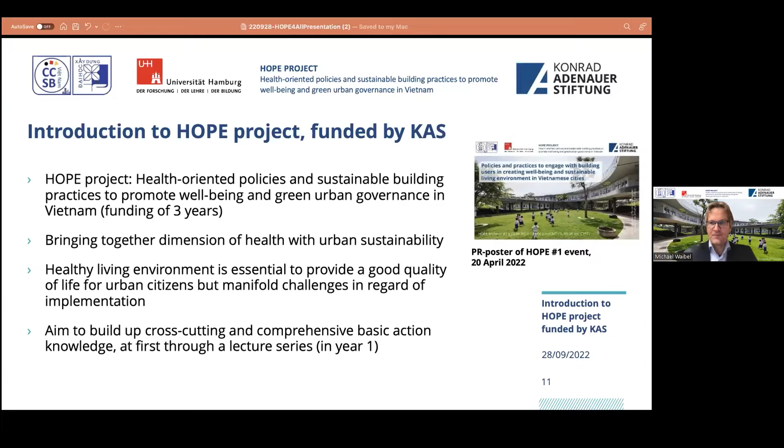Please, the next slide. We have had 4 webinars. Today, we deal with health governance to promote comprehensive life cycle assessment of materials to promote sustainable building in Vietnam. Building materials, most of you maybe are not aware, are really essential to have and to promote sustainability.

Next slide, please. If you look at the building material of concrete, a recent global report from the German Council for Sustainable Development, Humanity on the Move, Unlocking the Transformative Power of Cities, found out that there is a huge use of concrete in the world. In China alone, within 3 years, between 2011 and 2013, more concrete has been produced and used compared to the United States in 100 years. The biggest component of concrete evidently is cement, and cement worldwide is contributing alone about 10% of global carbon emissions. So we have to find and identify ways to minimize impact and maximize sustainability of these building materials in terms of construction.

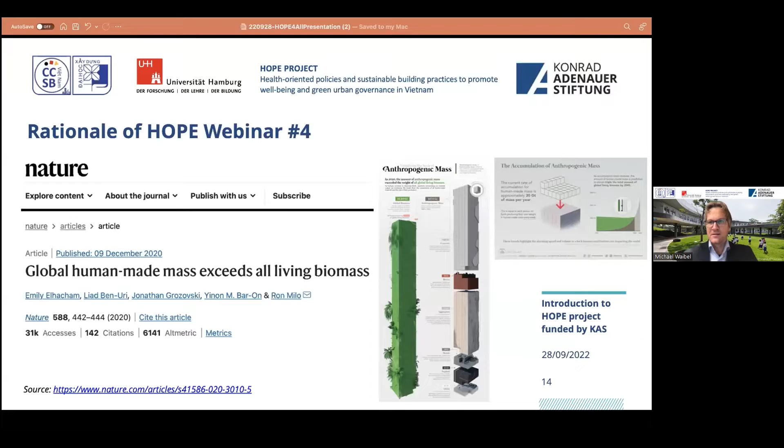And life cycle approach is one key element to that. Next slide, please. This is even more important because in 2020, we have reached a tipping point. For the first time ever on our planet, the global human-made mass exceeds all living biomass. So what we have constructed by building materials now is heavier than all the biomass on the planet. This really should be a point to think more strongly, to reinforce our efforts to promote sustainability in the construction sector.

Next slide, please. This is also one reason why we founded the Competence Center for Sustainable Building in Vietnam at Hanoi University of Civil Engineering. This center means to bundle multi- and transdisciplinary expertise of sustainable building knowledge in Vietnam, and more importantly, to transfer this innovative knowledge to the diverse areas of scientific application and to the general public. So we serve as a science-society interface. That's very important, and that makes CCSB-VN a key stakeholder in the future sustainable building practice in Vietnam. By means of this cross-cutting institution, we would like to overcome silo confinements and to develop CCSB-VN as Vietnam's not only leading think tank, but also a leading do tank in terms of sustainable building in Vietnam.

I'm very happy that my colleagues from Hanoi University of Civil Engineering have initiated this HOPE project, which is the kicking point of CCSB-VN. Thanks at this point again for the generous funding by Konrad Adenauer Foundation. Next slide. Okay, thanks. That's my short input. I wish this HOPE seminar a very good course and look very forward to the exciting presentations. Thanks so much.

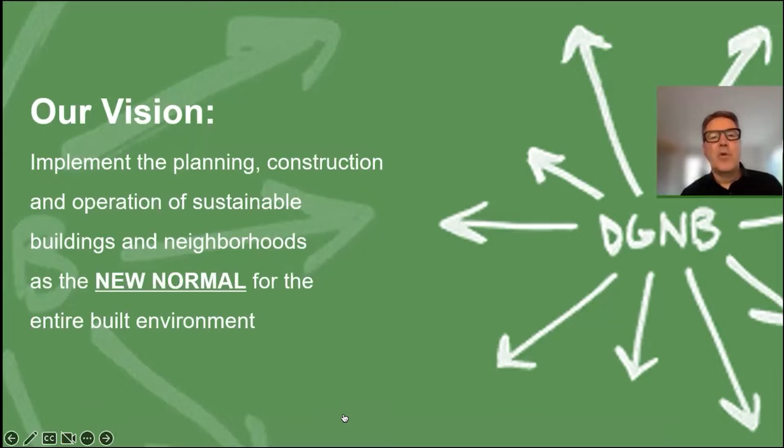This is very important. It's not a question for some lighthouse.

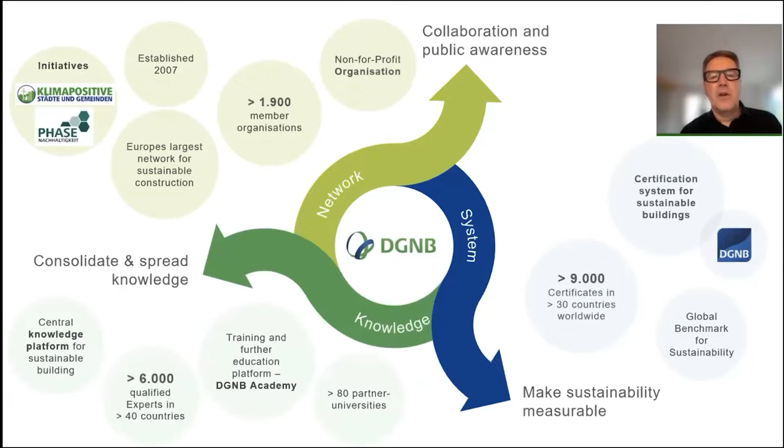Last but not least, it's about knowledge, to consolidate and spread the knowledge. For that reason, we have started the DGNB Academy to train experts for the market. If there are no experts, nothing will happen on the market. To support this, we are also working together with partner universities. More than 80 partner universities are in the network up to now. And this is not only in Germany, because sustainability is not a German issue, it's a global issue.

But today I want to talk about EU policy and how this is influencing and promoting healthy and sustainable urban environments.

A whole bunch of policies are defined and published by the European Commission. In this context, they look for a strategy and instruments to support a sustainable built environment.

One of the older ones is definitely the Energy Performance of Buildings Directive. It's the core directive defining in each member state - each member state is responsible to bring it into law. It's defining the required performance for new builds in Europe, with a strategy behind to have almost zero energy buildings by law. This EPBD is important because it's defining the future quality of the building stock.

But beside that, there are regulations like the construction product regulation, defining which products are allowed to enter the market. So this is a directive for the market. There's one single market for construction products in Europe, and therefore a European regulation is required for that. The construction product regulation is not only addressing performance but also environmental issues of construction products. It is also a basis for standardization on this level.

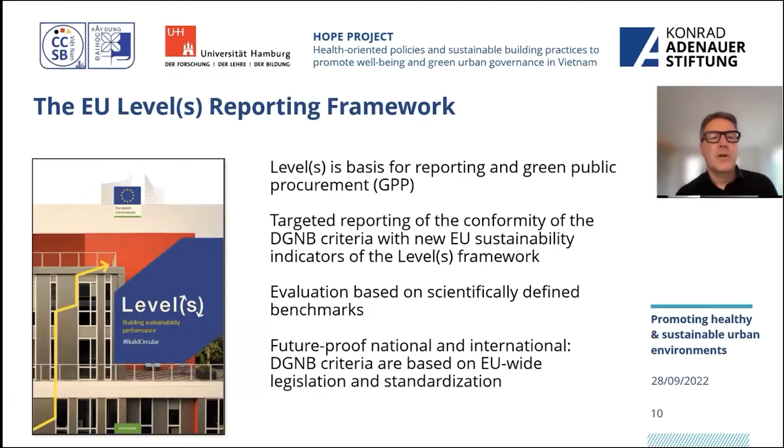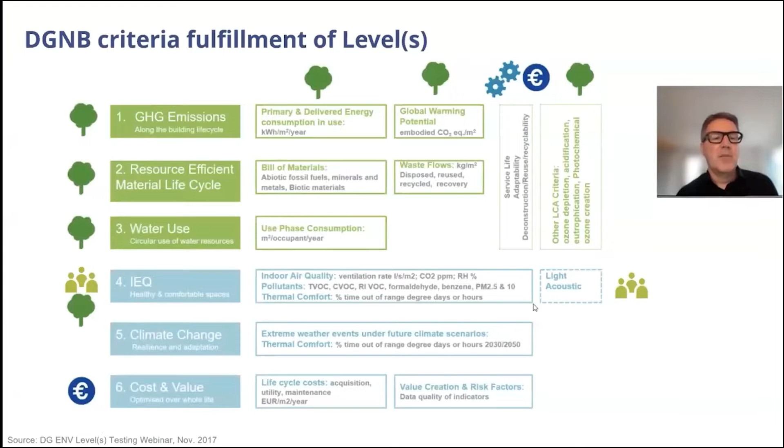The second part, or the newest element, in EU policy is the European Green Deal, with the taxonomy, the renovation wave, and a revision of the EPBD.

The EU Green Deal is, as Ursula von der Leyen said, Europe's man on the moon moment. So it's really starting something new.

It was published in December 2019, and it claims that Europe will become carbon neutral by 2050.

This is a big thing because a lot of things have to be done until then, so we have intermediate steps.

By 2030, at least a 55% reduction of carbon emissions compared to 1990 is targeted.

But also instruments like a carbon border adjustment mechanism, a draft of which is now published, are parts of the Green Deal.

In the end, the Green Deal wants to mobilize at least one trillion of sustainable investments over the next decade, because somebody has to pay for it.

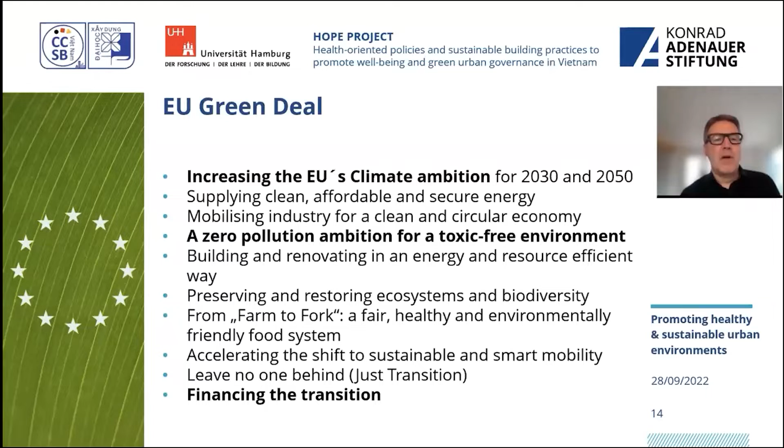But financing the transition is one of the core instruments, so I want to talk a little bit about this.

Financing the transition has a certain strategy. The first stage is to disclose the externalized costs. That's the first element. Secondly, to define what sustainable investments are.

Without having this definition, like for sustainable buildings, the DGNB catalog, without this definition it's not possible to increase the share of sustainable investment.

And it's not possible to put policy instruments on it without that definition.

If we look into this set of regulations and directives, you can see that the taxonomy, which defines what's sustainable and what's not from a finance perspective, is a core of these regulations.

But also the Sustainable Finance Disclosure Regulation is important because it defines who has to report about what.

So companies involved in the finance sector now have to report the share of green or sustainable finance, or the money they give to sustainable finance.

Secondly, the non-financial disclosure regulation is defining who has to report.

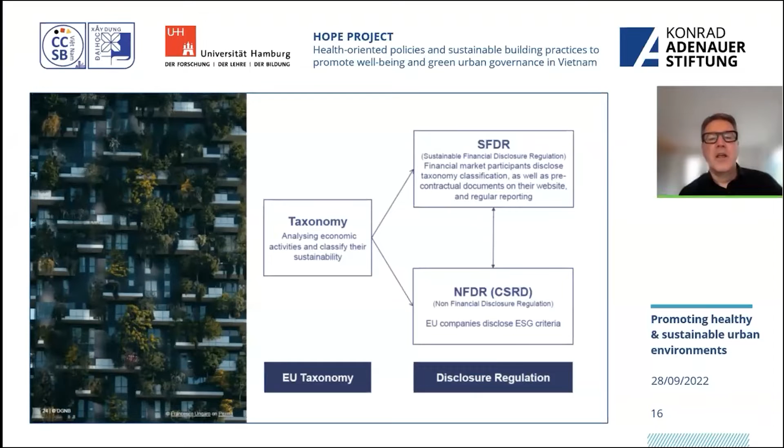So what's included in the taxonomy? The taxonomy has six environmental objectives, and here you can find again the criteria from the Level(s) reporting framework.

So you see consistency. First of all, climate change mitigation and climate change adaptation are core elements.

But also sustainable use and protection of water, a transition to a circular economy, pollution prevention and control, and protection and restoration of biodiversity and ecosystems.

So it's about the environment and about the climate, which is addressed in the taxonomy. I won't explain now how it works, but in the end you have to contribute significantly to one of these elements.

And for the other five, there are so-called 'do no significant harm' levels to achieve.

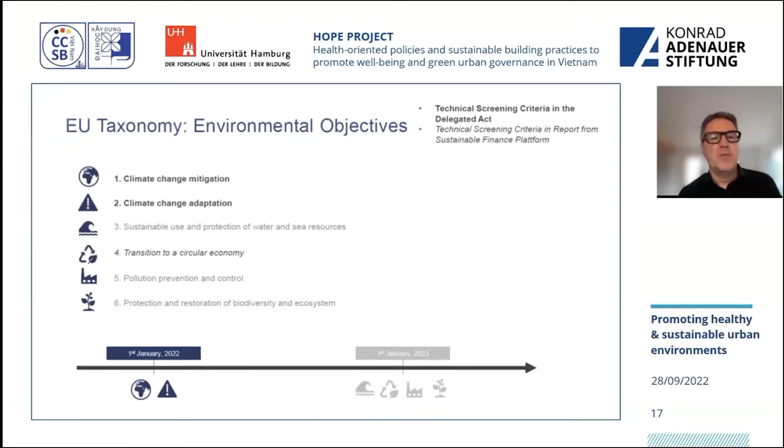If we now look at what this means for the EPBD, the Energy Performance of Buildings Directive, there will be main changes compared to 2018. From the new draft, new buildings will be zero emission buildings.

In the past it was nearly zero energy; now the target will be zero carbon emissions. The worst performing buildings are now addressed, which was not the case in the past.

So we will get a minimum standard about the performance of buildings, where you are allowed to rent it out, for example.

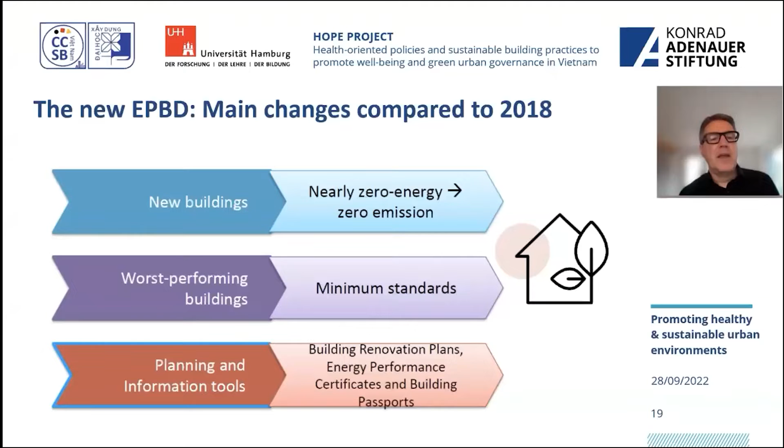This means there will be high pressure to renovate the worst performing buildings, and planning and information tools will be in place, like the building passport.

But now I want to come back to the sustainable construction strategy in Germany. Look at this beautiful building — it's the office building of the Environmental Protection Agency in Dessau.

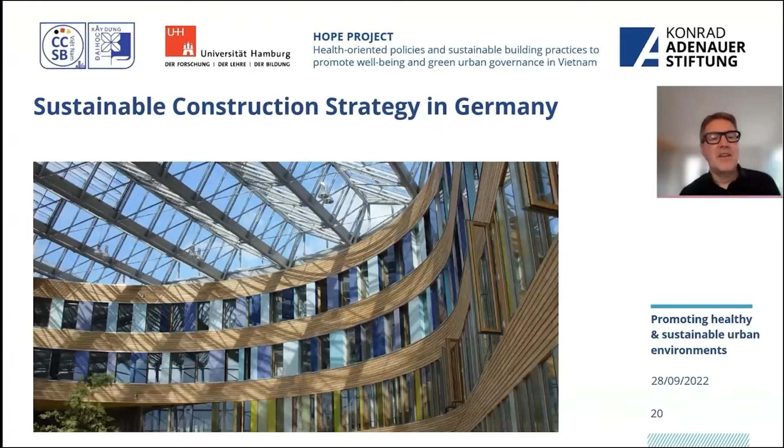Sustainable construction has a long history in Germany. More than 20 years ago, the Roundtable for Sustainable Construction was established by the ministry. The idea was to have all stakeholders on the table, discuss and get consensus on what's sustainable construction and what we mean by sustainability in the context of the construction and building sector.

Out of this work, after years, a guideline for sustainable buildings was developed and published. This guideline is now mandatory for new federal buildings, so the federal government is giving an example of how to build, which is an important signal to the market. The DGNB certification scheme is based on this guideline, in line with the findings of the Roundtable for Sustainable Construction.

Some principles and methodology behind this: there's a holistic view, meaning environmental, economic, social and functional qualities have to be included and brought into balance. This is important because if we cannot afford sustainable buildings, it won't happen at scale. If it's not good for the people, it won't happen. And if it's not good for society, it won't happen either. So this is one of the key pillars of this methodology.

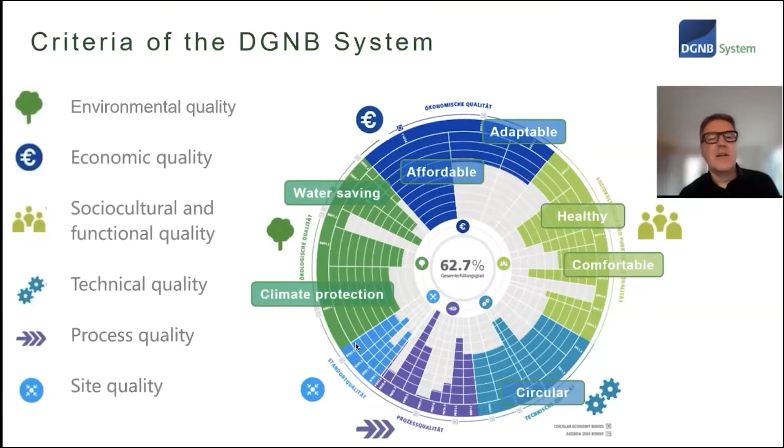But where should the data come from to do life cycle assessment? This is always a critical point. In this context, a combination strategy was developed at the Roundtable—a combination between a public generic database, called ÖkoBauDat, and EPDs, Environmental Product Declarations, for specific data. The responsibility to provide environmental information for the supply chain and value chain is on the industry side—who knows better what the company does than the producer himself?

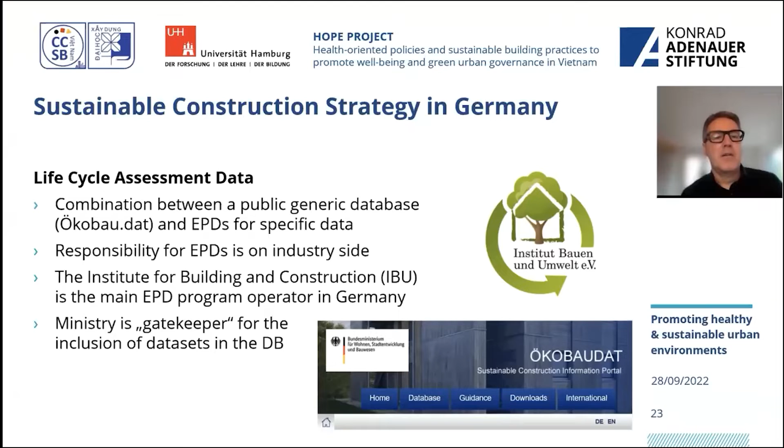There is a system developed, an EPD system, which is a global instrument. We see it in many countries, and it's operated by the Institut Bauen und Umwelt, the Institute for Construction and Environment. They look for consistency and third-party verification of the EPDs. The ministry is now the gatekeeper for the inclusion of data sets in the database, doing a second quality assurance. All EPDs in line with the methodological requirements can come into the ÖkoBauDat, which is part of the public database. I will come back to the role of this database later on.

Part of the strategy in Germany is the Climate Change Act from 2021. We have realized that within 23 years, CO2 emissions must be reduced to zero, which is very ambitious. If you see in this graph how emissions are coming down, we have to be faster, otherwise we may become climate neutral in 2070, not 2045. That is the aim, and the minister has presented this graph and really told us what the next steps are.

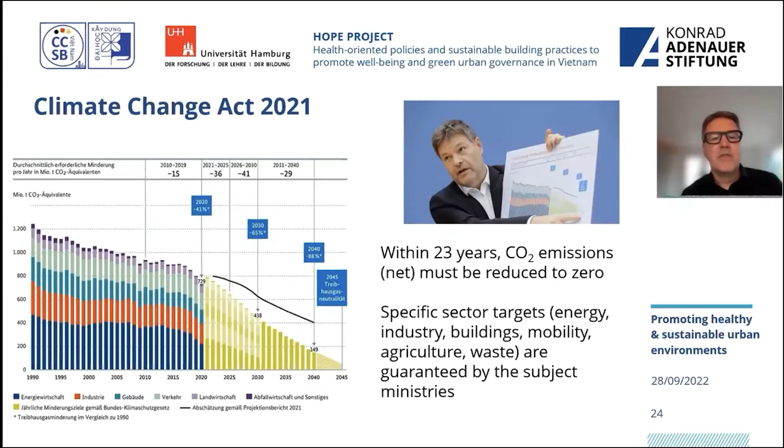One of these next steps is that subsidies for sustainable buildings are given in line with the quality mark for sustainable buildings. This funding scheme now combines the efficiency house—a certain performance level for the operation of buildings in line with the Energy Performance of Buildings Directive—with the sustainability class, which includes a life cycle approach, both underlying this quality mark.

But beside that, there are also other specific requirements in the quality mark. It's not only about carbon, it's also about energy use, use of certified wood, prevention of hazardous substances, design for all—very important—and green roofs for office buildings. Having these additional specific requirements beside the general requirements is necessary to bring the different qualities into balance. The documentation is done via a certification scheme like DGNB, where the specific requirements are documented and checked. It is available for new buildings—residential, offices and educational buildings—up to now, and it will be included in the renovation schemes coming next year.

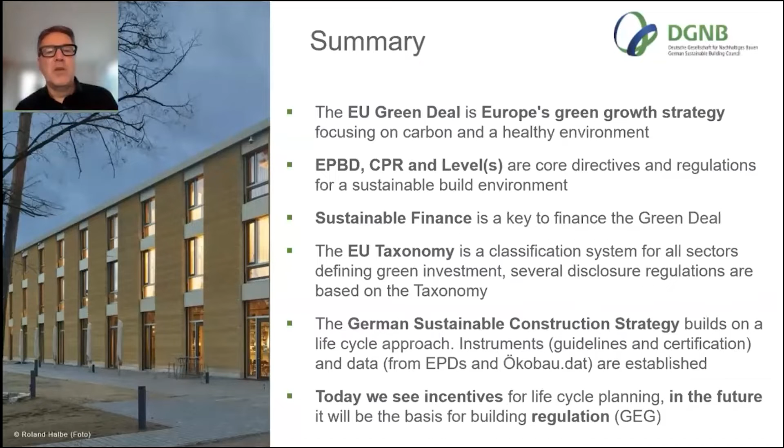Thank you very much. And with the view of this great building, which has a clay wall here, it is 12 meters high, I want to finalize my speech. Thank you for your attention and have a great day.

Thank you to Dr. Grieshammer, although he's not here with us in person, but we are fully informed of policies and instruments currently in effect in Europe and in Germany to ensure healthy and sustainable building practices. How about Vietnam? How are green buildings and sustainable construction being developed in Vietnam? Let's continue with our next speakers.

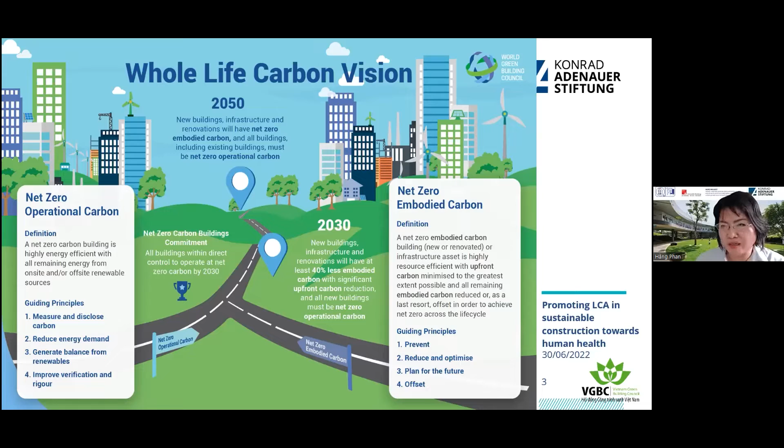So the WGBC issued the net zero carbon plan. First, it focused on operational carbon, the carbon emitted during the operation of buildings. And in 2018, the WGBC announced a more ambitious plan, which no longer focuses only on operational carbon, but also on embodied carbon, the carbon included in the materials of buildings. If you look at the annual global CO2 emissions, construction accounts for 39% of carbon emission, 28% from operational carbon, and 11% from embodied carbon.

So when we aim for net zero, what exactly do we aim at? You look at the left side, you see that buildings account for 39% of total emission, and it is projected that by 2050 it will increase even further because we will have double the current floor space. So in order to achieve net zero carbon, where can we have the reduction?

There are 3 strategies we can use for decarbonization. First, we need to reduce operational carbon, we increase resource efficiency as we operate buildings. This is the fastest and most economical way for us to reduce carbon emission and increase resource efficiency. We will be able to save 35% of carbon emission from operational activities.

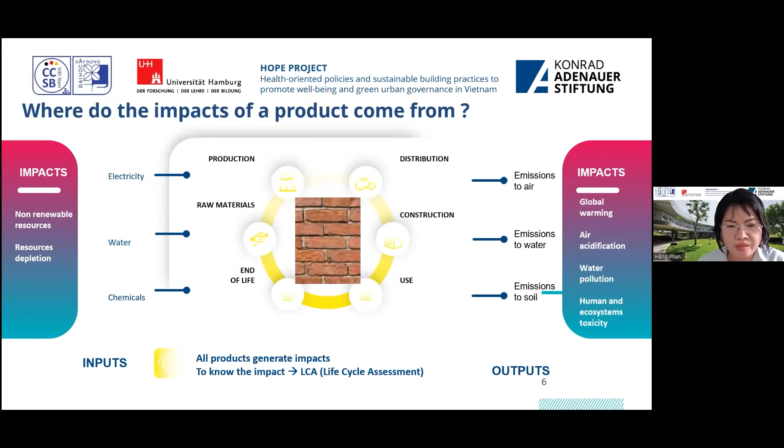So the LCA accounts for all the inputs, for example electricity, fuel, chemicals, water, and then it calculates the emissions to the air, to water, and also to soil, and then it identifies the impact. We start from the moment inputs are extracted and throughout all processes, distribution, construction, use, and recycle. And then we get an overview, a comprehensive view of the environmental impact of the product.

So this is a definition of LCA. As you know, LCA at the moment is the most common method to measure environmental impact, and it's based on two standards, ISO 14040 and 14044, which provide common standards for LCA measurements to ensure that we all follow the same standards to allow quality and comparability. At the moment there are different labeling systems, which may be confusing, but LCA allows us to compare buildings and systems according to the same standards globally. So LCA follows many steps

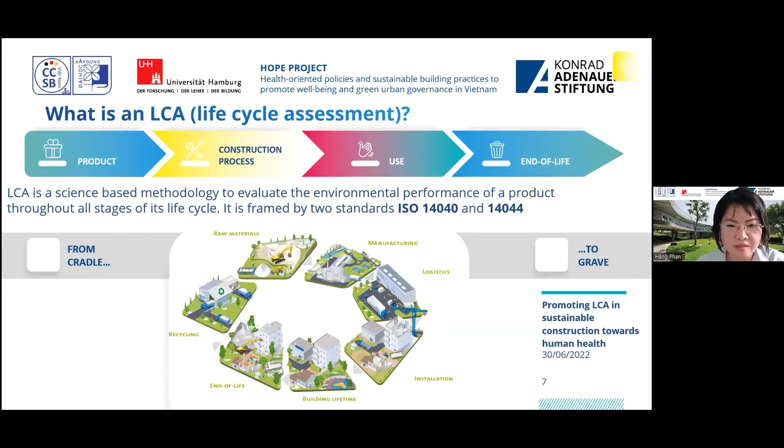throughout the life cycle of a building, from cradle to grave, from the beginning to the end. It starts from the moment raw materials are extracted through manufacturing, installation, use and apply, and recycling. This LCA method will provide us with a series of quantitative values for comparison. One thing to consider

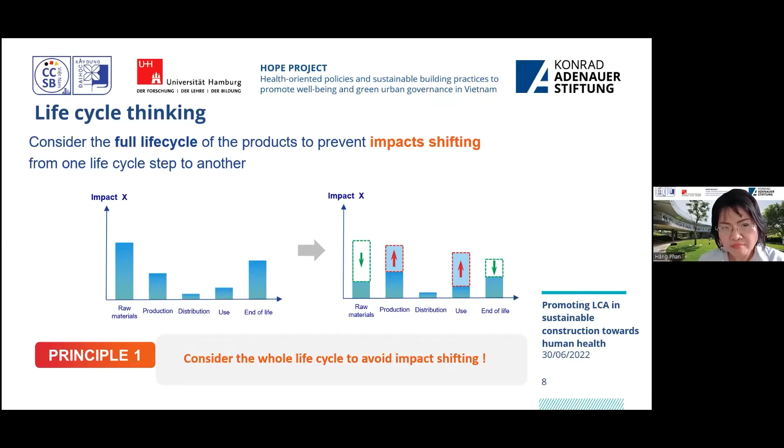is why we need to consider the full cycle of the product. Sometimes you think you need to look at only one step, but for example, in terms of production, we want to measure product A. When it is manufactured, it releases less emission than product B. However, if we follow the life cycle, we learn that after distribution, product B will actually produce less emission than product A. So some products will emit less emission during the production phase, however it will release more emission during the use phase. So we need to be mindful of that.

And this diagram shows the embodied carbon from A1 to A2, A3, which is: A1 means extracting materials, A2 transporting to factories, A3 production. So if we focus only on production, we focus only on A3, but we leave the remaining steps: installation, transportation, use and apply. After the building is demolished, there are other steps such as the potential for recycling. So we need to measure all the steps from A1 to C4.

So throughout this life cycle, you see that apart from the B6 and B7 periods, which are operational energy use and operational water use, all the remaining steps refer to embodied carbon. And at the moment, we see that the standards in Vietnam often look at only one step. Why? In fact, we need to measure all the steps throughout the life cycle if we really want to achieve

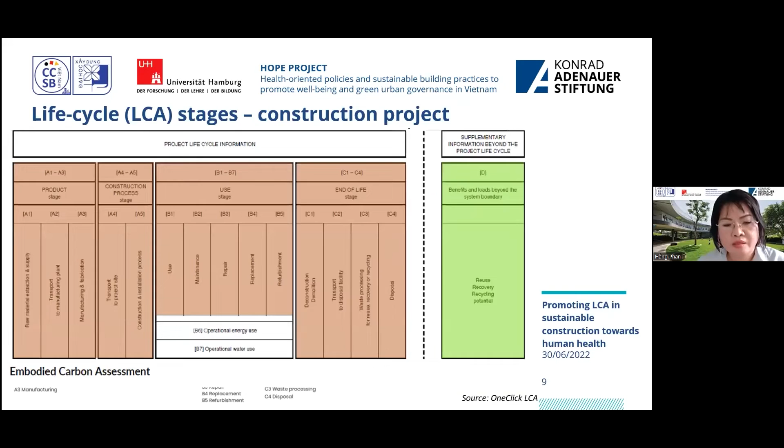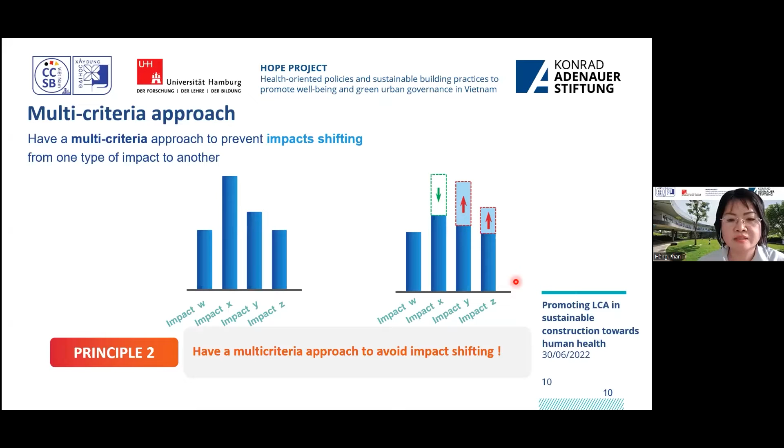net zero. Another principle is we need to have a multi-criteria approach. For example, on the left, a product has impact X which is less than the impact X of another product. However, in terms of impact Y and impact Z, it actually has more impact. In that case, we need to be mindful of impact shifting.

So what kind of impact do we need to be mindful of when we use LCA? First, global warming potential: how the product contributes to global warming, measured in kilograms of CO2 equivalent. Second, abiotic depletion potential, for example the depletion of fossil fuels and minerals.

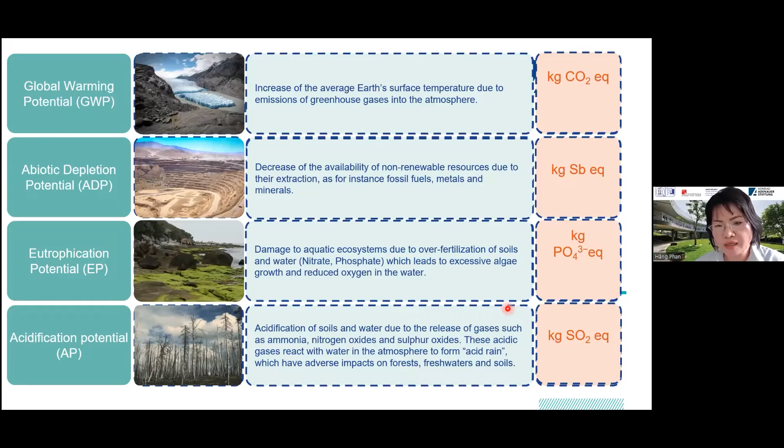Eutrophication potential refers to the impact of over-fertilization of soils and water, which leads to excessive algae growth. Another thing to look out for is acidification potential, such as sulfur oxides and nitrogen oxide. These acidic gases may create acid rain, which has severe impact on forests and rivers. Another impact may be photochemical ozone creation because of hydrocarbons and VOCs, colloquially known as summer smog in cities.

Another impact is the ozone depletion potential because of emission to air of CFCs and other halocarbon compounds, often used as solvents. Then we need to look at total primary energy use, measured in megajoules, and the amount of water we require to produce those materials. These are the key indicators that we measure using LCA, giving us a total of 28 indicators so we can measure the environmental impact of a certain product.

So depending on the product, not every material has to go through all 28 indicator measurements, so it depends. After we run the LCA assessment...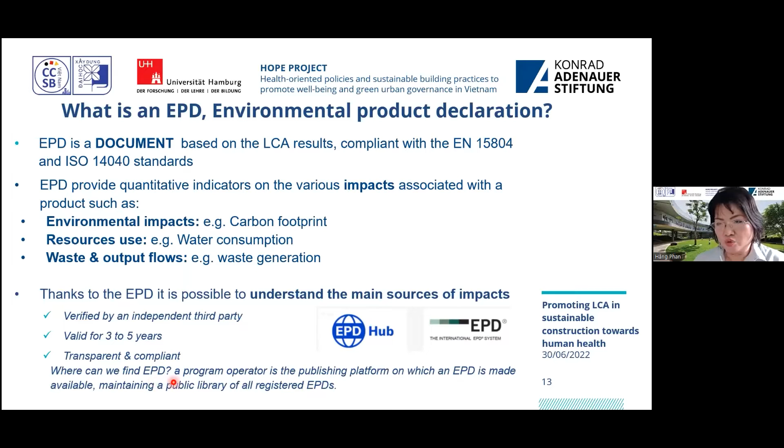Using EPD, we can identify the various environmental impacts of a product. The good thing is that EPD is verified by an independent third party, very transparent, and it is valid for 3 to 5 years, and it is accessible using a public platform.

So what you will find in EPD, normally there are 5 sections. First, general information about the factory where the product is manufactured. Second, product description. Third, LCA calculation information—what kind of LCA we use. Then life cycle stage description from A1 to C4, or only A1 to A3. Finally, LCA results as quantitative measurements, which are the most important part in an LCA.

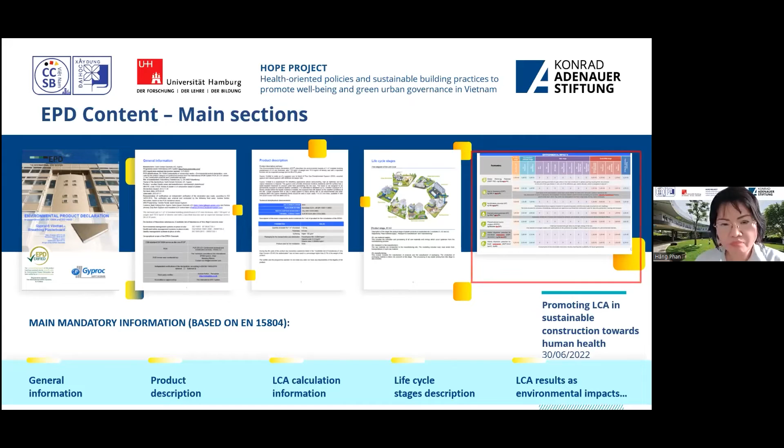So when we compare LCA results, we need to pay attention to the functional unit of the EPD—whether we are using the same functional unit, for example 1 kilogram of concrete is different from 1 square meter of concrete walls, or whether we are using the same set of measurement, A1 to A3 or A1 to C4.

Who can use LCA and EPD? There are 3 groups: developers or investors, consultants, manufacturers, and policymakers.

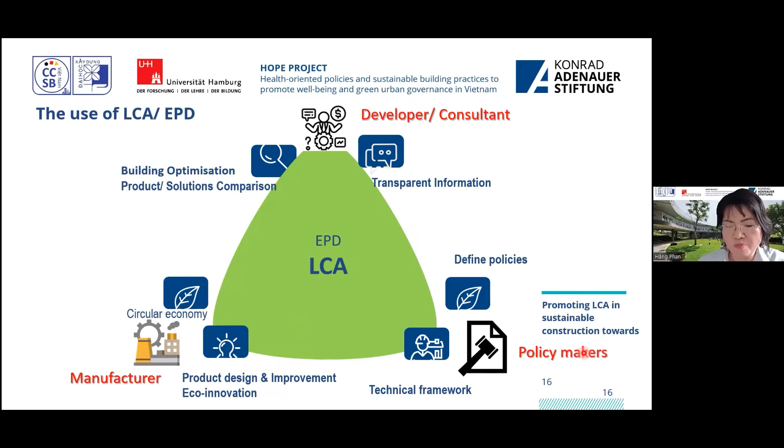For developers and consultants, when we look at the EPD, we can compare and assess to choose the best option in a way that is transparent and consistent. For manufacturers, they can also look at the EPD to design and improve products towards eco-innovation to reduce the carbon footprint. And for policymakers, we can use EPD to identify whether a product complies with technical regulations such as net zero.

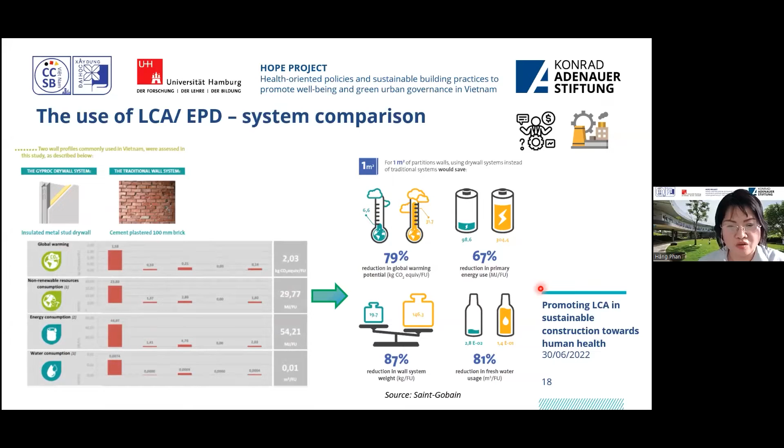Another example: two solutions for walls, insulated dry wall and cement plaster brick wall. The dry wall releases almost 80% less gas compared to cement brick wall, and it also consumes 80% less water than the cement brick wall.

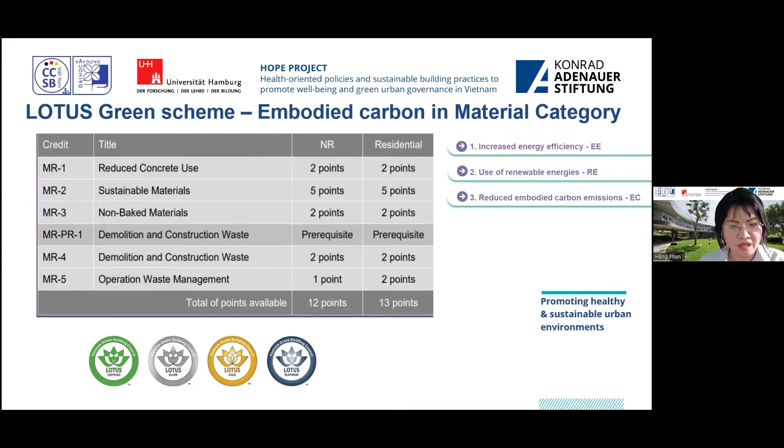According to the Lotus Green Scheme, we also include the criterion on embodied carbon as part of the material category. We encourage the use of materials that use less concrete, and instead we should use non-baked materials and sustainable materials. This is an overview of the Lotus Green Scheme.

When the WGBC conducted surveys to understand the readiness of regional countries, they realized that government leadership is not always ready, meaning there are not always sufficient regulations in place to ensure net zero.

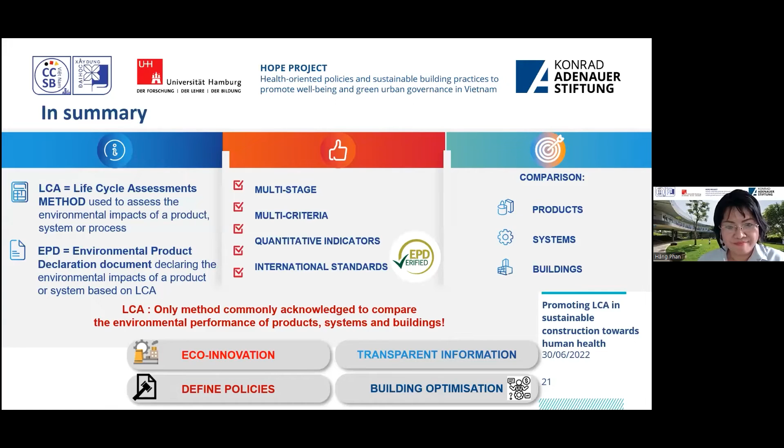So in summary, I just gave you an overview of LCA and EPD. LCA, life cycle assessment, is currently a widely recognized method to assess the environmental impact of a product, a system, or a process. The EPD is the document declaring the impact of a product based on LCA. LCA is multi-stage, multi-criteria, using quantitative indicators that are internationally recognized, and EPD will provide transparent information to investors and developers, as well as producers, and policymakers will find EPD and LCA a very useful tool to create a transparent and clear legal framework.

This is my presentation. Should you have any questions, please send me a message in the chat box. Thank you for your attention.

My thanks to Dr. Phan Thu Hằng for a very useful presentation with lots of technical knowledge on how to use LCA in the world and also in Vietnam. Phan Thu Hằng has 20 years of experience in building sciences. She has been keen on promoting sustainable solutions for new builds in Vietnam.

Now let's continue with the next presentation by Dr. Lê Trung Thành, Professor Lê Trung Thành. Professor Lê Trung Thành is also an alumnus of HUCE. He obtained a doctorate from Liverpool University, and at the moment he is the president of Vietnam Institute for Building Materials, or VIBM. He has advised the government to develop the sustainable building material development strategies in Vietnam. Dr. Thành.

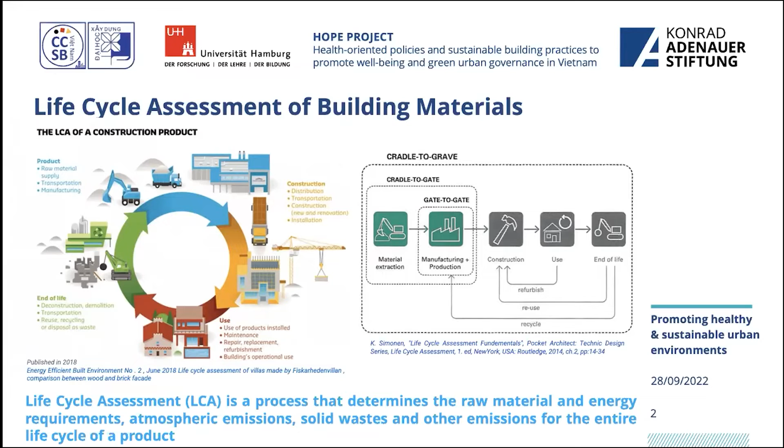And to do that, we really need policy to regulate all the processes. In Vietnam, if you look at this, Vietnam produces a large amount of building materials every year. So this is an example from 2020: cement, 100 million tons; ceramic tiles, 600 million meters; and natural stone tiles.

19 million square meters, glass 230 million square meters, lime 5 million tons, burnt clay bricks 20 billion units, non-burnt products 8 billion units, roofing materials 500 million square meters, sand and coarse aggregates 190 million cubic meters, concrete 155 million cubic meters.

And according to our estimation, by 2025 and 2030, we will see a consistent increase in the amount of building materials being produced, as Vietnam is still a developing country and currently in a rapid urbanization process. And for that reason, Vietnam needs more and more building materials.

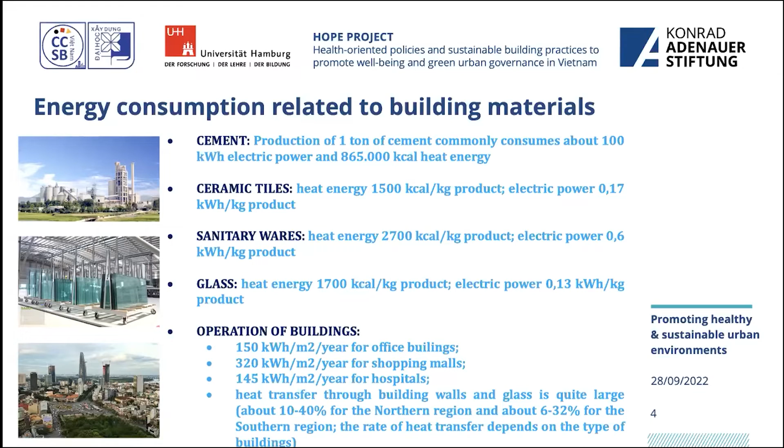So, for example, maybe an office building or shopping mall consumes 300 kWh per square meter per year. So in that situation, what kind of documents and policies has Vietnam put in place to regulate the production and use of building materials to ensure efficient use of energy, both during production and during use, and how to facilitate the circular approach and LCA.

At the moment, the legal system of Vietnam focuses mainly on mining and production, and also the impact of materials as they are included in buildings. However, we do not have enough regulation for recycling of materials. So we only focus on mining, production, operation, but not yet on recycling. Recycling of building materials to turn them into building materials perhaps is an issue that requires further policy attention.

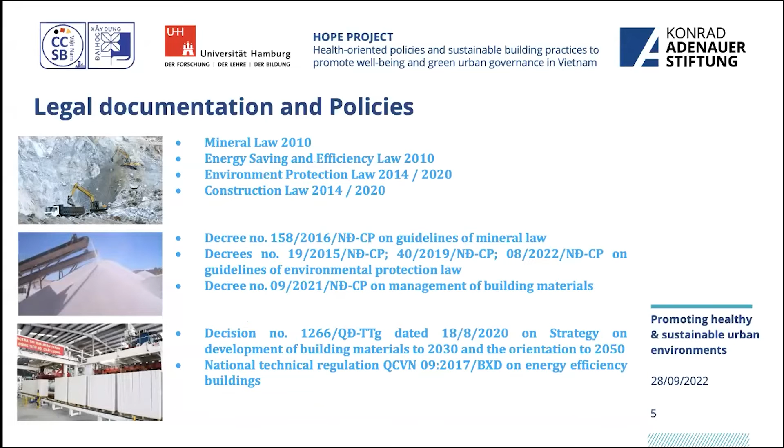In this slide, you see some important legal documents and policies currently in place in Vietnam which we can use. For example, the Mineral Law 2010, with a series of sub-laws such as decrees and circulars. So the law regulates the use of minerals, including minerals for building materials. Another is the law on energy saving and efficiency, the law on environmental protection 2014, and we have the law on construction 2014, revised in 2020. So we have a very specific regulation on the extraction and use of minerals for the production of building materials.

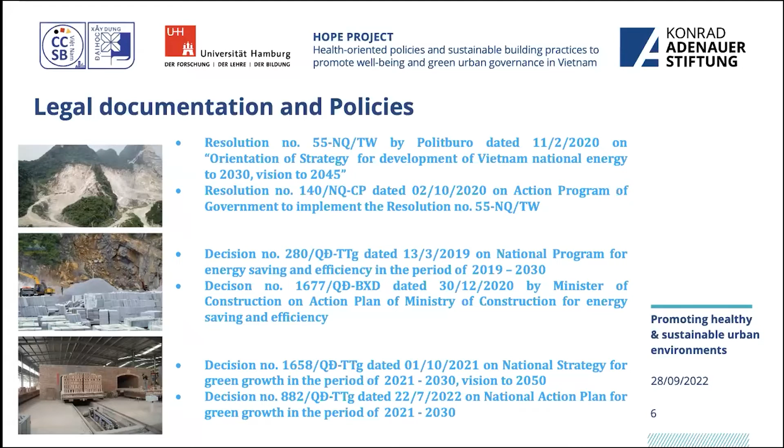In addition to those laws, there are also a series of resolutions by the party committee and by the government to issue development strategies. For example, strategies for the development of Vietnam's national energy sector by 2045, the national program for energy saving and efficiency, and ministries of construction. There is an action plan of the Ministry of Construction for energy saving and efficiency, with a separate section on building materials, how to improve the quality and how to change the features of building materials to facilitate energy savings and efficiency.

In the construction law amended 2020, Article 110, you see very detailed regulations on building materials, what kind of standards we must follow when we use building materials, for example, safety, efficiency, and reasonable use of natural resources. There is also a decree number 9 on the management of building materials, which states that the state encourages organizations and individuals to conduct research and develop new technologies in the production of building materials in the most energy saving and environmentally friendly way.

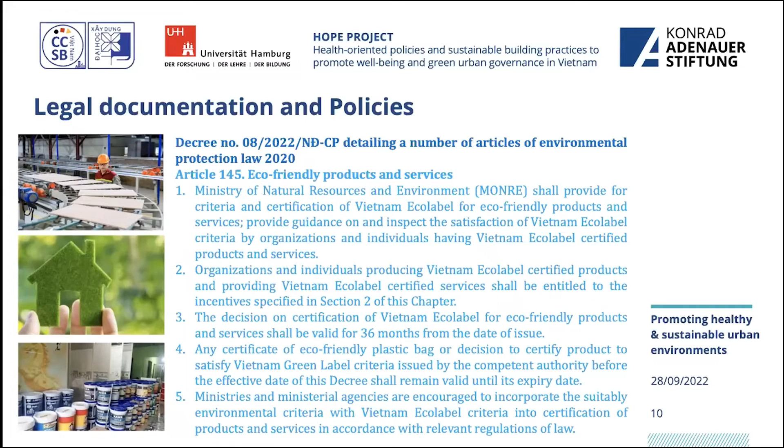And in 2022, there's a decree number 08 detailing the environmental protection law. There are a series of regulations on eco-friendly products and services, for example, the need to develop a labeling tool to ensure that any materials produced are measured in terms of their environmental impact.

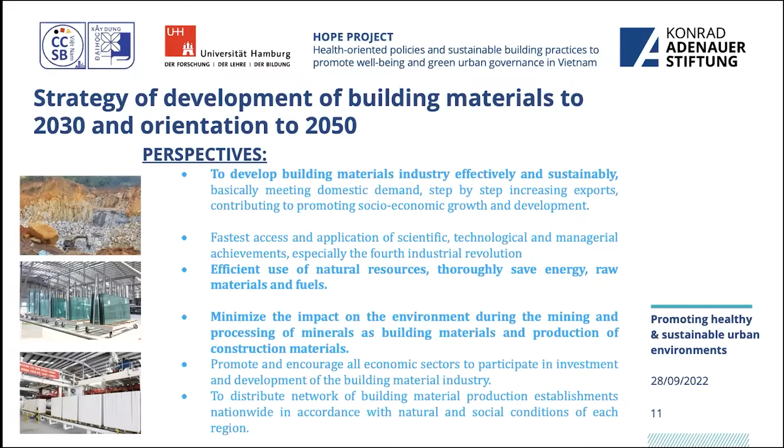Another important policy which relates to building materials, both the production and use, is Vietnam's strategy for development of building materials until 2030 and orientation until 2050. This strategy emphasizes that Vietnam will seek to maximize or utilize its very limited natural resources through the effective use of energy, raw materials, and fuels, with also an emphasis on green products. The general goals of the strategy are to develop the industries of building materials production to an advanced and modern level, to produce products that meet international quality standards.

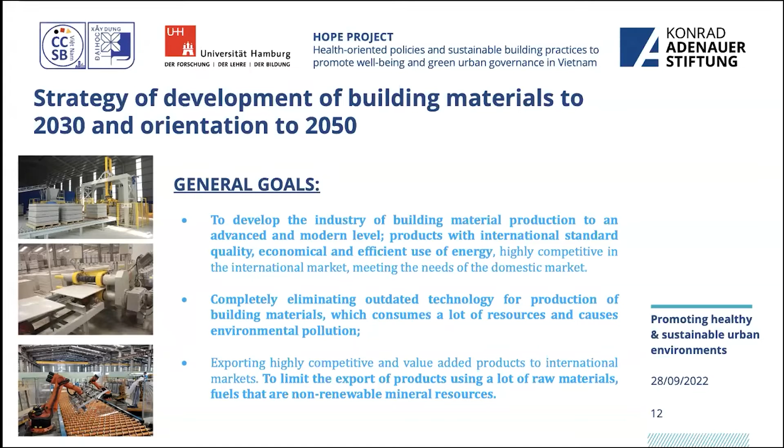In the strategy, apart from the aims and general goals, there are also quantitative standards. For example, when we produce some material, how much consumption is allowed for cement? The heat energy consumption must be reduced to 730 kilocalories per kilogram of clinker cement. There are similar standards or thresholds for ceramic tiles, sanitary wares, and also glass, both in terms of heat energy consumption and electricity consumption. The new thresholds are much lower than the current accepted level at manufacturing facilities in Vietnam, and there will certainly be pressure on manufacturers to comply with the new standards. If we can do that, we will really reduce the amount of emission.

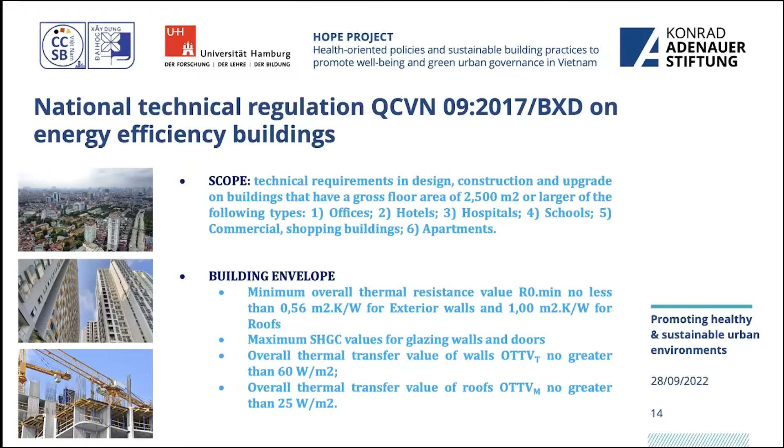Regarding the use of building materials in buildings, there is the technical regulation by Ministry of Construction 09 concerning energy efficiency buildings. This is a new legal tool that details the energy efficiency standards for office buildings, hotels, hospitals, schools, and even apartments. For all of these buildings, there are standards concerning the kind of materials that can be used and that should be used, with specific indicators, for example, thermal transfer values of walls or thermal resistance value. So designers and investors must keep those regulations in mind.

Another tool being used in Vietnam, which my institute is currently administering the development of, is labeling—energy labeling and green labeling for cement products. This is a very recently issued initiative.

We conducted this research for a long time with the project concept with Hamburg University and other universities from Germany as well. We identify the thresholds of key building materials in Vietnam, for example bricks, concrete, and glass that are widely used in civil construction in Vietnam.

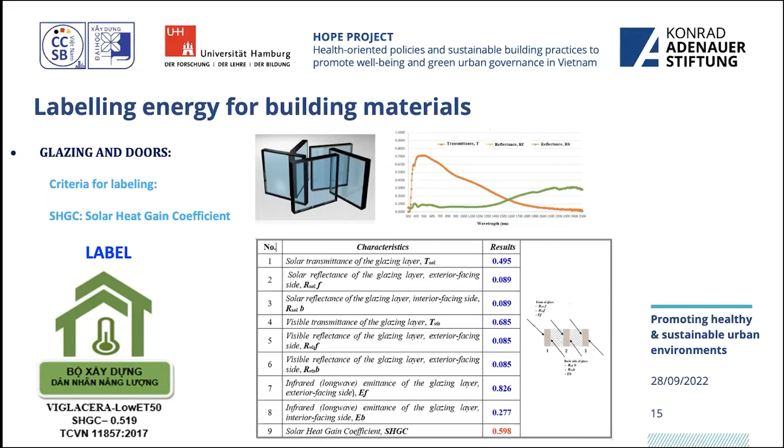So according to the new scheme, all the building materials will have an energy label. If you look at this, we focus on roofing materials in particular.

So I just give you an overview of the policy system and also legal regulations in Vietnam concerning how to promote energy saving, reduction of greenhouse gas, and carbon emissions.

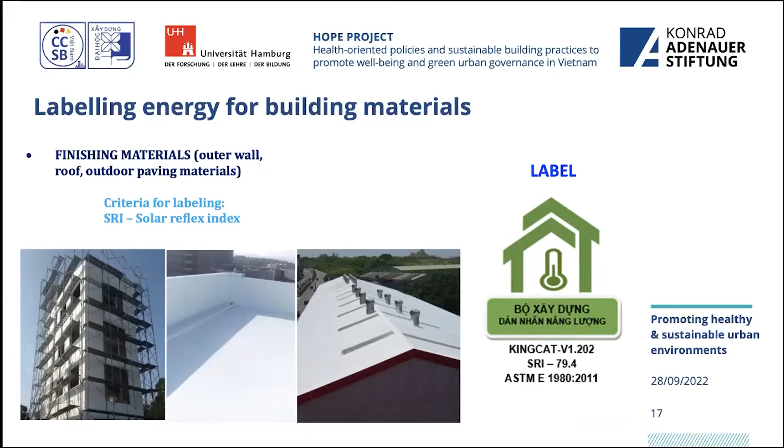These policies are an important tool for us both to measure the environmental impact of building materials through LCA, and also to put in place new policies to really reduce environmental effects. Of course, we also need further research to have specific guidelines for each type of building material, and our institute is open to cooperation initiatives, particularly with German partners, for the extraction, transportation, production, and use of building materials. How can we measure the environmental impact of different materials in each step?

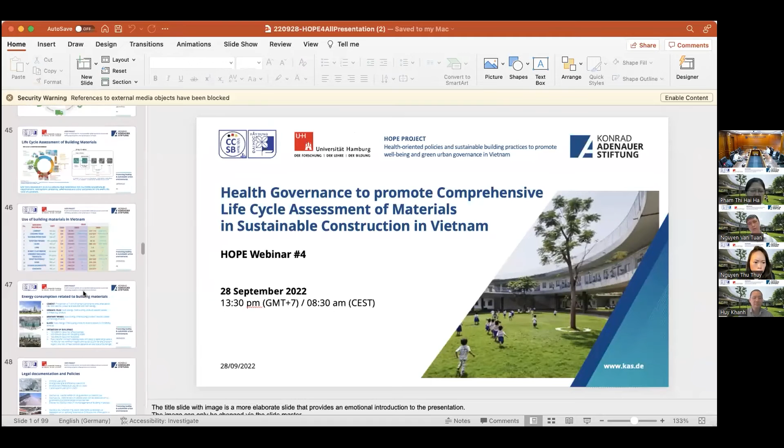We can discuss different issues, for example green growth and green buildings in the world and in Vietnam. So one of the main questions is how to use LCA effectively in Vietnam, and in what kind of applications LCA can be used.

We also have a commentator, Mr. Nguyễn Huy Khanh, former director of VNCC, a very famous agency and consultancy body regarding the use of green materials. So how can we facilitate green buildings in Vietnam? What are the roles of different stakeholders—consultants, users, and manufacturers? What should they do in order to promote green buildings and green materials in Vietnam?

Professor Tang just mentioned the initiatives on energy labeling for roofing materials and concrete. So one question for you is how the energy labeling may have an impact, and I hope you can also share your experiences with us as well.

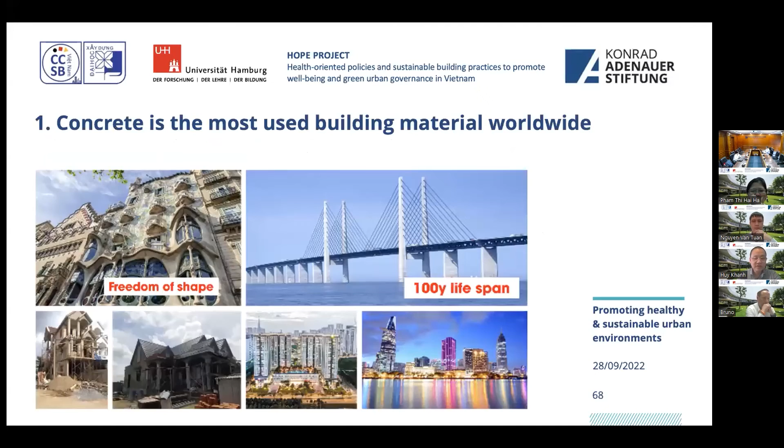Greetings to the organizing committee, and my thanks to all the speakers for your presentations, very informative. I am invited to serve as a commentator, and I represent practitioners in the field of green buildings and green growth. Allow me to have a few comments. As you may know, I have worked as a consultant and designer for 30 years, and I participated in the development of 6 key national constructions in Vietnam.

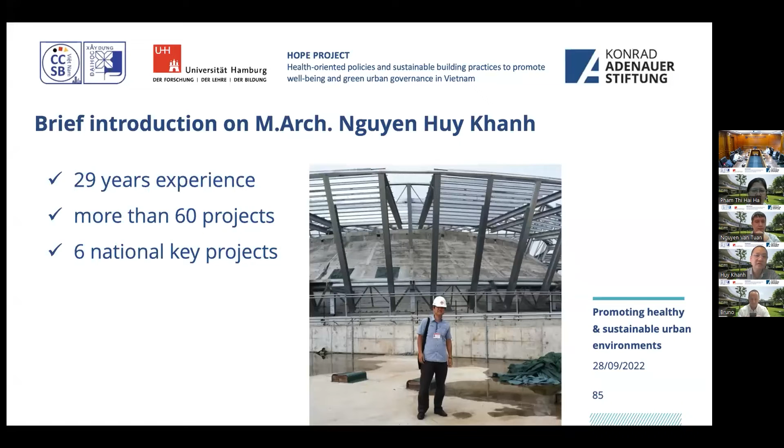In Vietnam, key national constructions are buildings that receive prioritized state funding, but at the same time require adherence to very high technical standards regarding materials and buildings. For example, the National Convention Center in Hanoi, the building of Vietnam's National Assembly, Hanoi Museum, the headquarters of the Ministry of Public Security, and the office of the Laos National Assembly. I participated during the design and during the monitoring of the construction.

So we had to make difficult choices concerning the building materials we used, how to balance between the budget, the economic cost, the duration requirements, the technical specifications, and also the environmental impact of the construction. Out of those 6, 5 had a German consultant as the primary consultant. As a Vietnamese consultant, we advocated for the use of energy efficient and environmentally friendly building materials throughout.

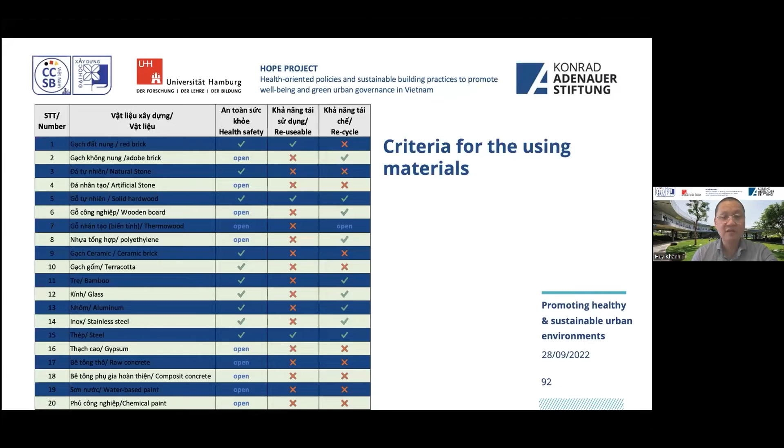There are some materials that I put as open here. The reason is that at the moment we do not have sufficient information to decide whether they are safe for health or whether they can be recycled yet. So the section where I put open is for materials where we lack information on whether they are safe for health, for example chemical paint, water-based paint, or composite concrete. We look forward to a labeling system that gives us users and developers more information on how to use those materials, whether they are safe or not, and how to compare between different options.

When I combine the two tables, out of the 20 building materials, around 10 to 15 meet the criteria that we expect. For example, red brick, adobe brick, solid hardwood, wooden board, polyethylene, bamboo, glass, aluminum, stainless steel, and steel. Of those, I particularly emphasize solid hardwood and steel, which meet all three criteria that we mentioned.

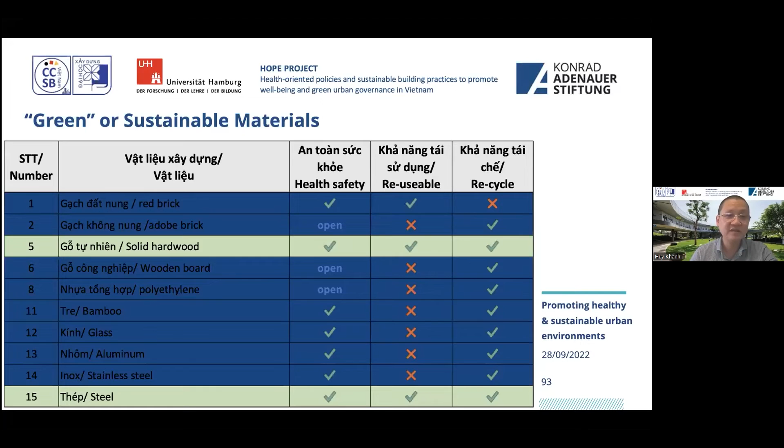That being said, if we can use the LCA tool on these materials, we can be much clearer about the environmental impact of each material. It would allow us to have a clearer idea as to how we can achieve zero carbon. Unfortunately, in Vietnam at the moment, we do not have LCA available to us users. So thank you very much for your attention, and let's continue the discussion on how we can find the solution for this.

My thanks to Mr. Huy Khanh for the many practical experiences he has just shared with us. He has rich experience in construction in Vietnam. He raises a problem that we need to pay attention to three things concerning the materials we use: health safety, the potential for reuse, and the potential for recycling. Nowadays, we also need to pay attention to the environmental impact, particularly as we try to facilitate green growth in Vietnam. Thank you for pointing out problems with the use of building materials in Vietnam, for example the absence of a labeling system and LCA information.

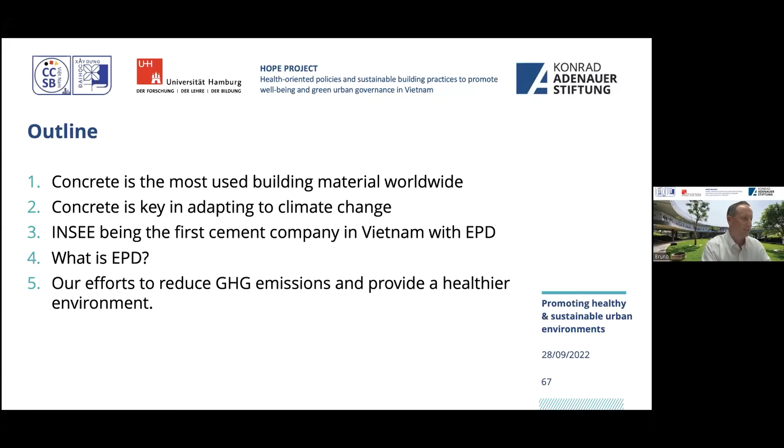So, as mentioned, concrete is the most used building material worldwide. This is because I think it's a very robust material. It has a long lifespan. It's quite flexible—you wouldn't believe it, but concrete is quite flexible. You could put it in any form that you actually wish, and it remains there for many years.

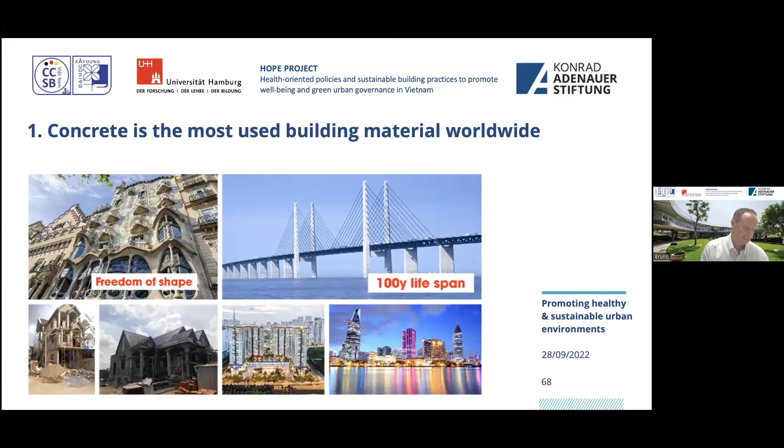So, overall, I would say as well, if you're talking about numbers, about 3.8 tons of concrete is produced per person per year. So it's a huge amount. And as I said, facing climate change, I believe that concrete can play as well a role when it comes to flooding defense. Concrete is fire resistant, etc. So this will play a role, I believe, as well in the future.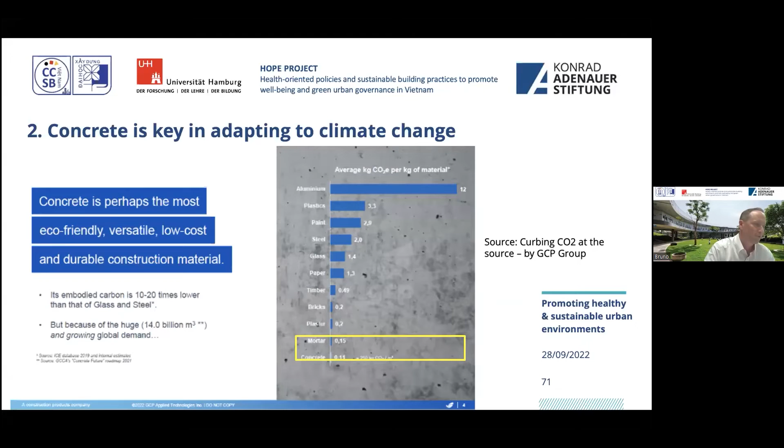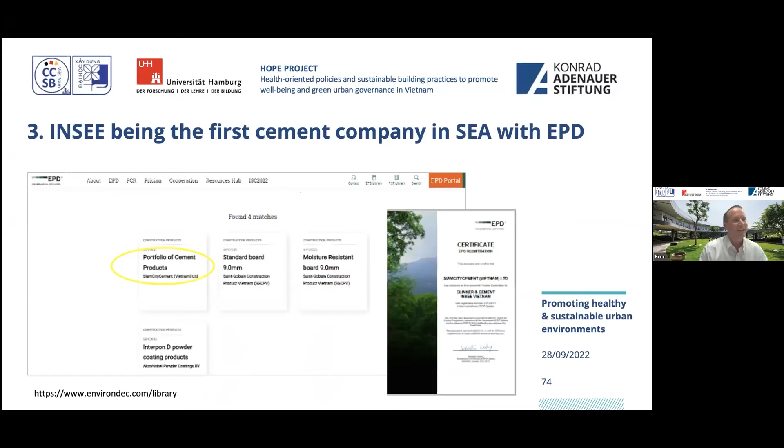The next slide basically shows that we were the first company in the cement industry in Southeast Asia—go back one slide, seven—yes, that applied EPD, the Environmental Product Declaration. And for us, it was a natural development. Already in 2017, INSEE was part of the green database where we had our products. In 2017, we then went for the green label of the Singapore Green Building Council.

For 7 of our products in 2019, we had the green label for all our products. And for us, it was natural to say, okay, what is next? What is the next step? And this is when we started to look into EPD.

Since 2021, we have our EPD for all our products in Vietnam. For us, it's important to be transparent, to have a kind of benchmark, because we have a lot of initiatives helping us reduce our CO2 greenhouse gas emissions. We would like to communicate this to end users, architects, etc., so they can compare if they use our product versus a competitor's, what is the difference, what is the impact.

So in our EPD, what you see here on slide 75, we are basically covering the phases from A1 to A3. This EPD is publicly available, so you can go on the website and find it, with all the information about INSEE Vietnam, the company, production process, and obviously all the metrics linked to our products.

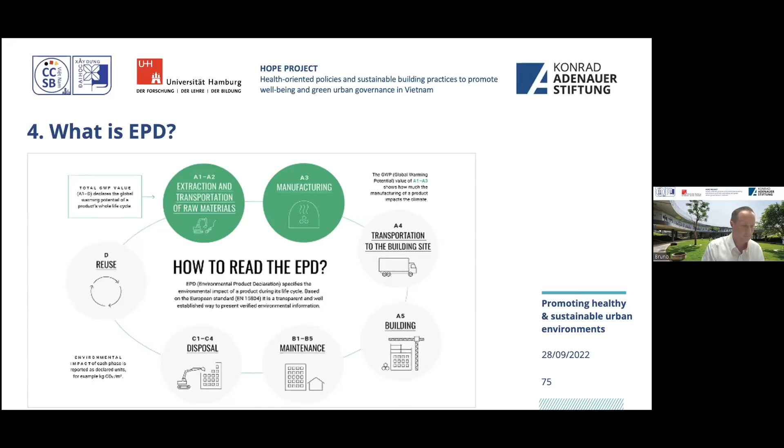The next slide, please, slide 76. We are having a lot of efforts to provide a healthier environment. First of all, we are working very rigorously on green manufacturing, so whatever we can optimize, we will try to optimize. For example, regarding energy and electricity consumption per ton of cement, based on industry-level figures, we are actually quite lower because of all the initiatives we have in place.

As an example, we have waste heat recovery installed in our cement plant. That means about 25% of the electrical energy demand from our plant is covered by this waste heat recovery.

In the middle, you see our EcoCycle business, our waste management offering. This helps us solve two problems. One is that a lot of waste today is not managed properly and goes into landfill, polluting the environment and leading to methane emissions, etc. So we take this waste and produce an alternative fuel out of it, which then replaces coal at our site. This is the second big advantage of our EcoCycle business, that we can reduce the use of fossil fuels.

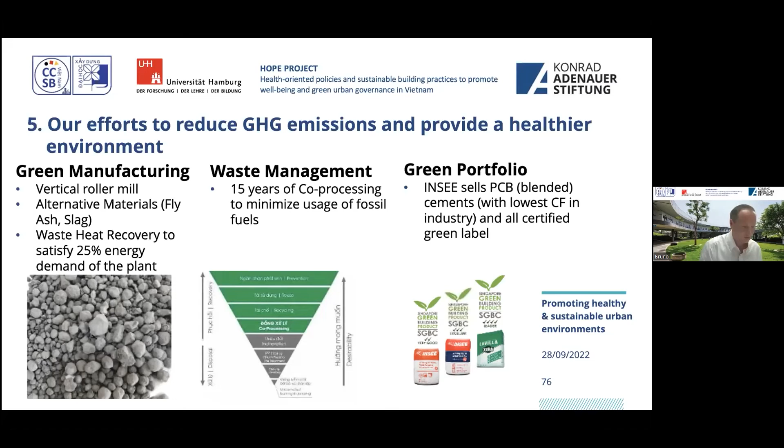Last but not least, we are working very diligently on our product portfolio. We are using blended cements, and all of our products are blended cements with the lowest clinker factor in the industry. We are also developing new building materials, so-called light building materials. For example, Conwood is one of these products we are bringing into the market, to make sure the end user, the architects, have a choice between different products, and can choose a greener option or a product with less environmental impact.

On the next slide, you basically see the impact on our CO2 emissions, over the last 25 years, approximately, or 20 years. From 1998, when we started to produce clinker and cement here in Vietnam, it went down quite drastically until 2020, because we invested a lot into green manufacturing, product portfolio, etc. And of course, the journey doesn't end there; we would like to further reduce our environmental footprint.

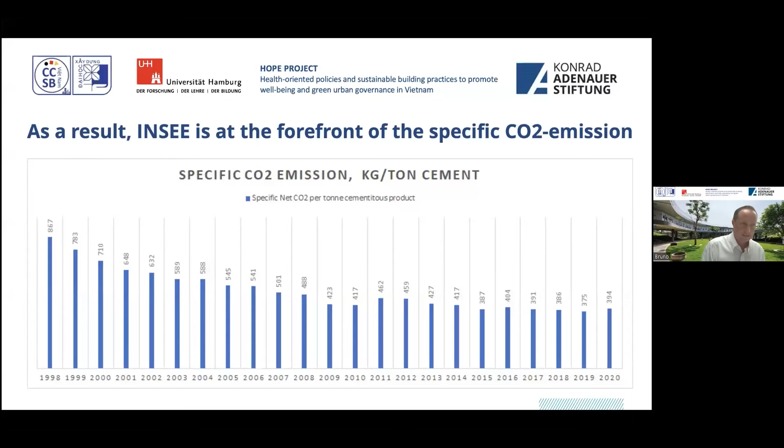The last slide, next slide, is just to give you a little perspective. Climate, energy, and CO2 greenhouse gas emissions are obviously very important to us as a player in the cement industry, but we have some other pillars in our sustainability ambition 2030. We have to look into circular economy, what we can do in terms of waste-derived fuels, increased use of byproducts, and then biodiversity and water, which is very important. I think a thriving biodiversity is one aspect of a healthy environment, so it's very important. We have many actions there as well, and targets. We want to be net positive by 2030 on our biodiversity aspect.

And we have a lot of initiatives to reduce water consumption and to increase surface water usage. All of this we have to do together with the community, together with stakeholders, with authorities, with NGOs, etc., to make this happen.

Last but not least, occupational health and safety is really our foundation for INSEE. We have to take care of our employees, our contractors, our community where we operate. Very important, we basically have a zero harm objective and ambition for health and safety. So that was very quickly to give you a little bit of input on our company and why we went into EPD and what are the different initiatives and activities we have to reduce our environmental impact. Thanks a lot.

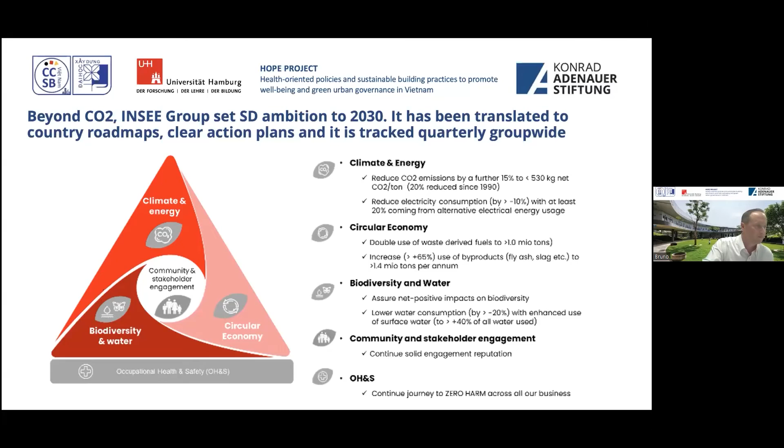Thank you, Mr. Bruno from INSEE, for these fascinating sharings of experience in a particular field, which is the production of concrete. As Bruno said, it's perhaps the most common building material in the world right now.

So the extensive use of concrete requires attention because of the potential impact, for example CO2 emissions. Our priority is to reduce the environmental impact of concrete production as well as other building materials. And Bruno provided a series of measures that have been put in place by INSEE, lots of improvements and innovations through all phases of the production process. And he provided evidence, very optimistic evidence, that INSEE managed to reduce emissions by more than 50%, and also managed to convert lots of waste into actual fuel, reducing landfilling and also increasing energy efficiency.

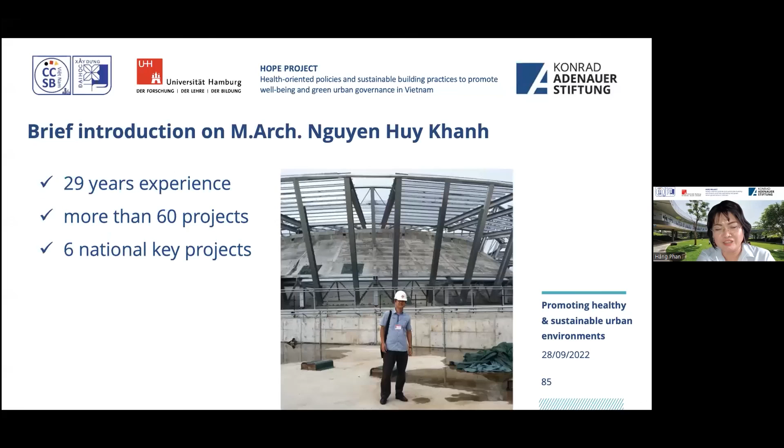I hope next month the Ministry of Construction will organize Green Buildings Week, and perhaps we will get the necessary legal framework we have wished for. I think it's high time for a decision at the high level to be made. Construction accounts for 40% of total carbon emissions, so if we go for net zero carbon, construction has to be the primary focus. To do that, we need very clear guidelines and direction.

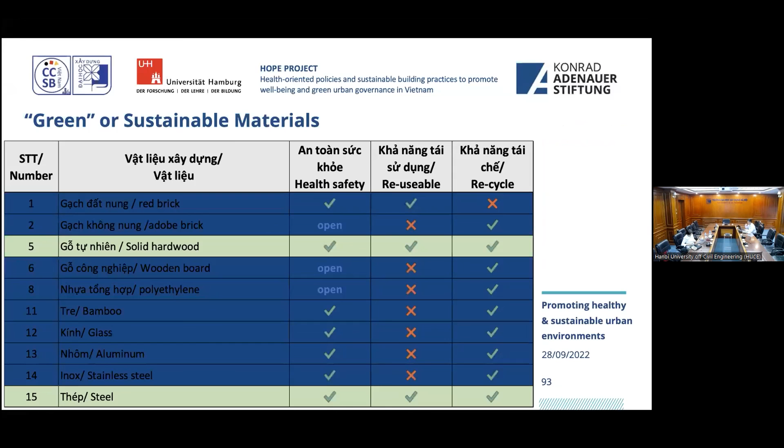I agree with your question—you asked why there have been so few green buildings in Vietnam. My thanks to Madam Hằng for the questions and the answers. Certainly, we always face challenges and opportunities as we seek to promote green buildings.

There's another question, about the use of composite materials. Many people argue for natural materials, materials that require minimal energy to produce and are also more environmentally friendly. So the question is whether we should promote the use of those natural materials in our construction today.

The question for Bruno is: what do you think of this idea in Vietnam, for example, the shift from composite materials such as concrete to more natural materials? We really thank you and your company for the support you've given our students, for example the competition for green initiatives in Vietnam. We really love those platforms at our university—we often gather students from different backgrounds: engineers, designers, architects, and building materials specialists. So we're wondering whether at your company you have any similar initiatives to develop new materials suitable to Vietnamese conditions and more natural.